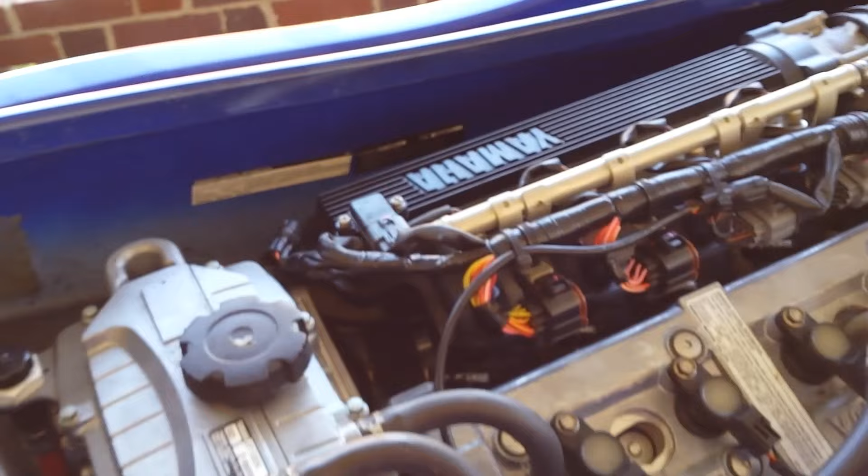Well, Dad just said the oil is doggone $12 a quart for it. Alright, so we got the top of the engine here. Of course, this right here is where you're going to pull the oil out of it and put the oil in.

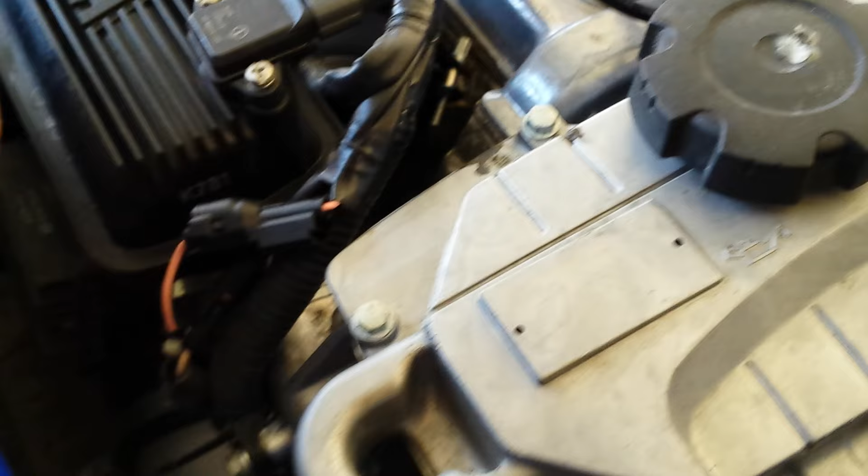But the trick we had to find was just to find the doggone oil filter alone. Looked around several places on the internet, and no one could really give a definite answer as to where the thing was. So we kept looking and looking, and we discovered it.

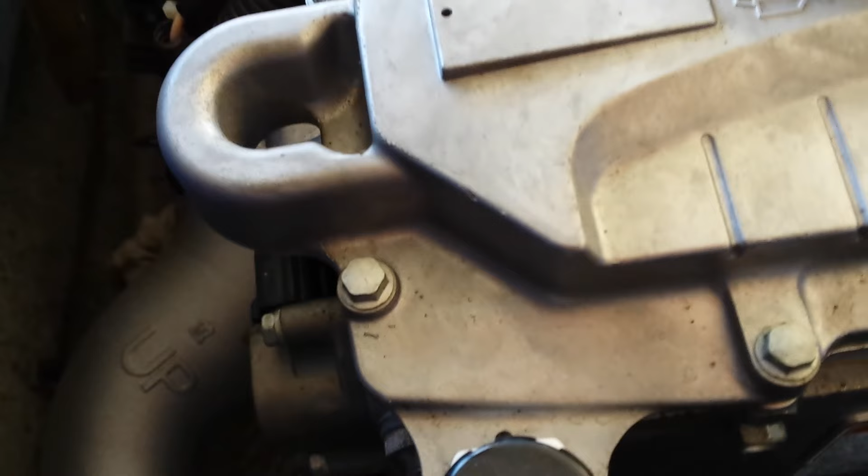Let me get this stick and point it out to you. Look where I'm at on the motor - this is where you're going to put the oil in, it goes down inside that reservoir. Here's your valve cover, watch where the stick goes. Right there at the end of my stick is the filter.

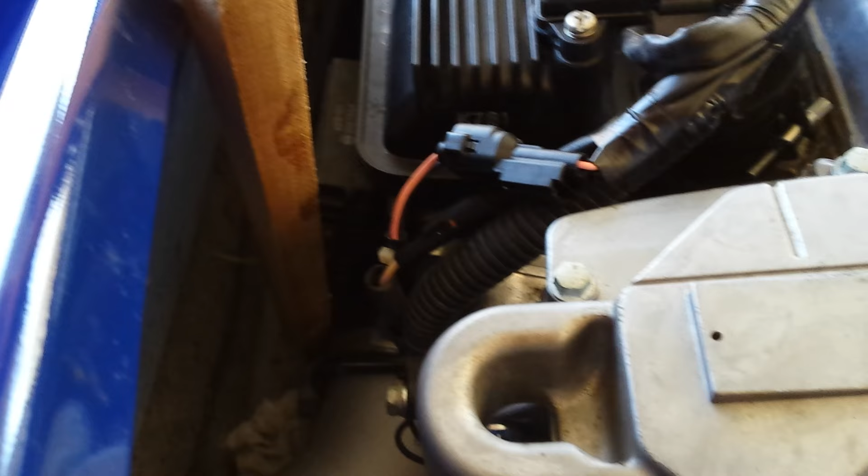See where the exhaust here is coming back? Right in front of that is where the filter's at. It is shoved down in a hole, so Yamaha's not going to make it easy on you.

Alright, let me get the tools ready. We're going to start changing this filter out and get the oil out.

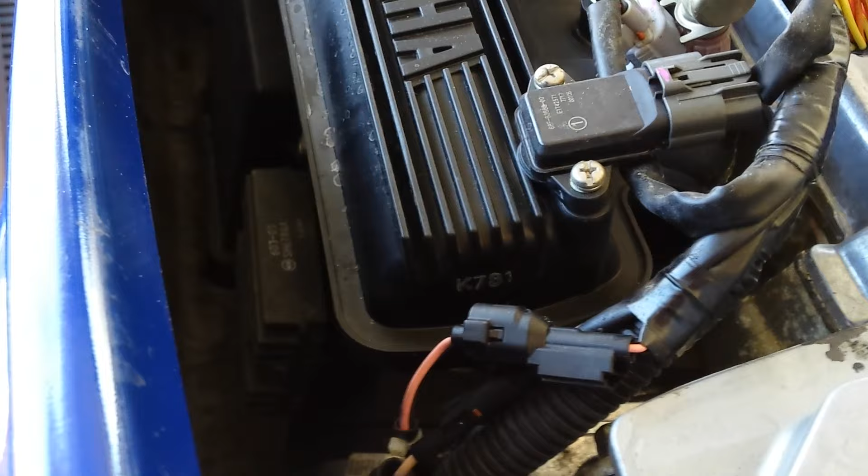Alright, we've already pulled some of the oil out of it, but just so I give you guys a demo of the nifty little pump. You guys can either use that one YouTube video I have about using the suction pump, the airline, or I'll put a link down below where you guys can get a pump to pull this stuff out of here.

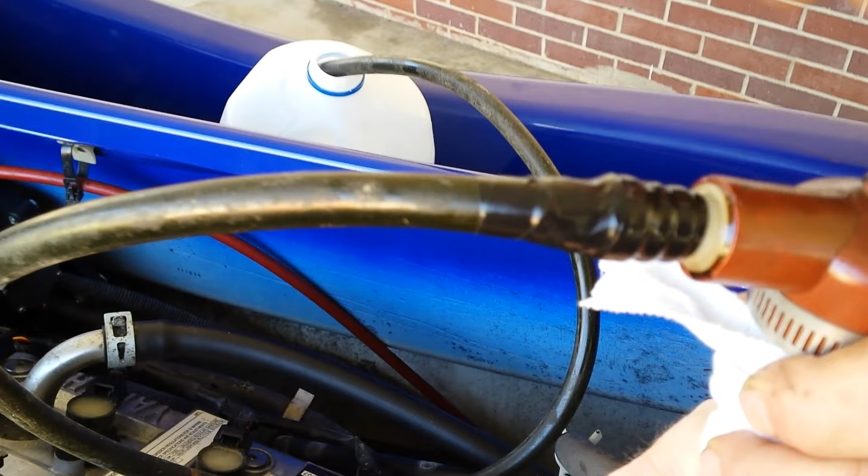But basically, just drop it down inside there, and got a jug right there, pumps it right out. The rag is because the pump's leaking - got a brand new one and it don't even work. So this is an old pump right here that's leaking, so wrapping a rag around it to keep from making a mess. Yeah, you do that redneck engineering, do what you can to make it work.

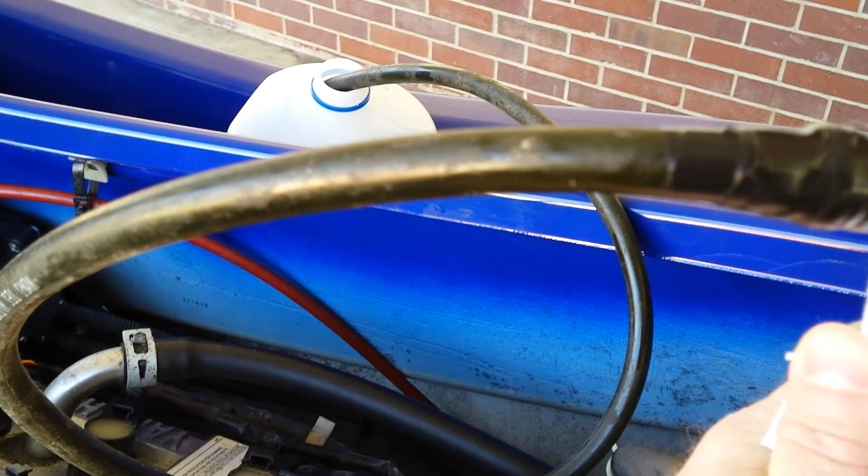So you can get them pumps a lot slower at Walmart, that's for a lower unit on a boat. It's a good idea, go to Walmart, get the lower unit pumps - that'll work great on these. It's slower.

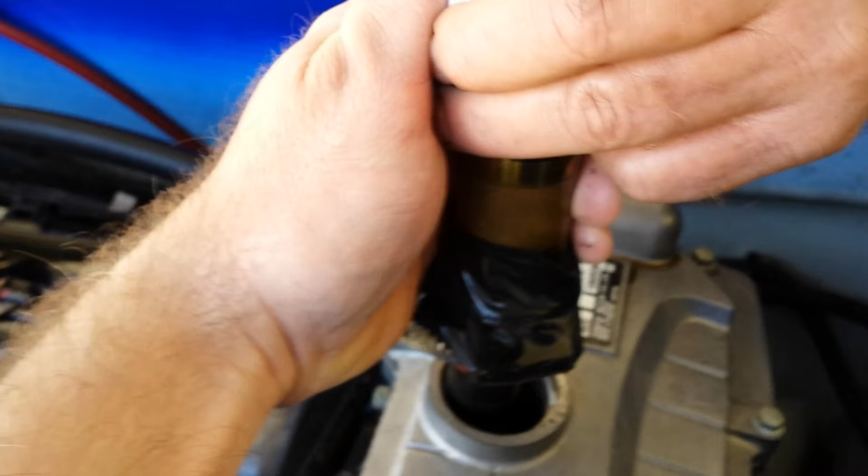Lucky, it's puking oil.

Over there's that pump that's talking about.

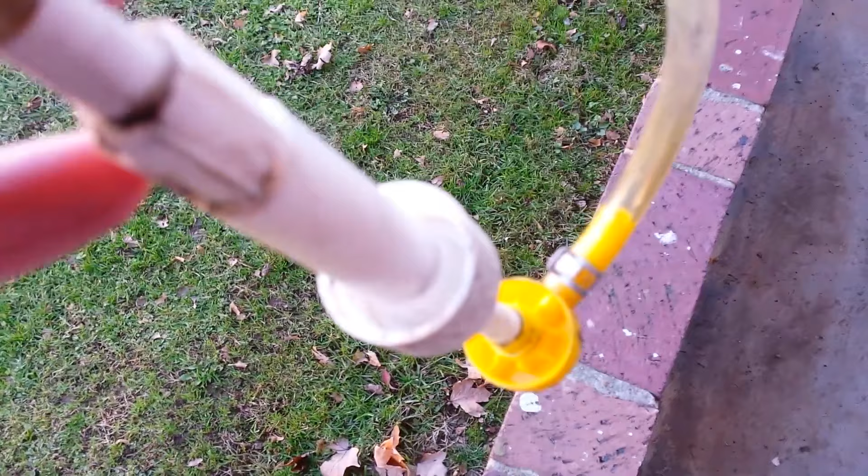And here's another little nifty pump here that you can pick up at your local department stores. It's for lower units on the boats, but what you can do is pump the oil back into it. Or if you want to pump the fluid out, stick this inside the reservoir here where that's at, stick that down inside there and just pump it. It's slower than the pump we're using currently, but hey, it still works - it gets the job done.

See down yonder? That's where it's at now. I just dropped it, but you got the point.

Now, after you get all the oil pumped out, you can see it's having to come in from the side where the exhaust is, arm going up the side there and getting to the filter. There's a rag under the filter because there's really not much way, whenever you pull that filter off the block, you're going to lose some fluid, some oil. So having something underneath to try to minimize your mess.

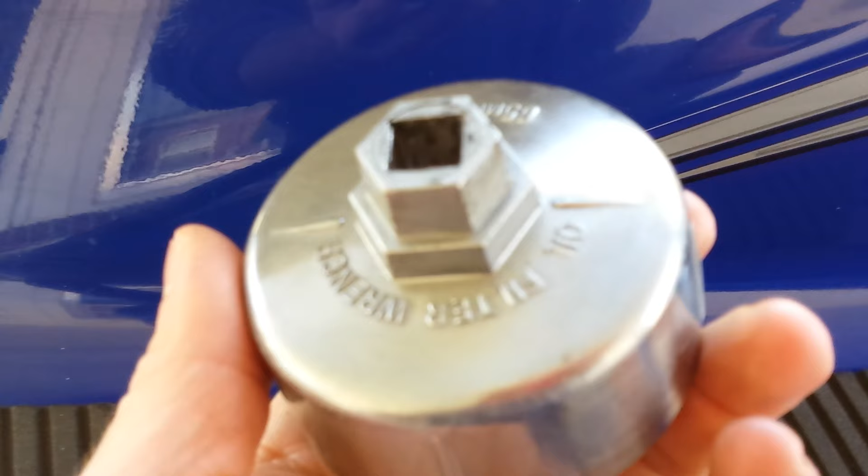Okay, you look at the new filter here, this little socket set right here. What'd you say you got these? Harbor Freight? Yeah, my dad picked these up at Harbor Freight. Handy little things, they come in a multi-pack, you can grab different filters. This little bitty one worked really good on this.

And if you've got one, just be sure I'm telling you guys the right number - it's the Yamaha VX1100B-G.

And here is your filter part number, if I can focus on this. Just in case, here's the Yamaha number and the Denso number: 5GH-13440-50.

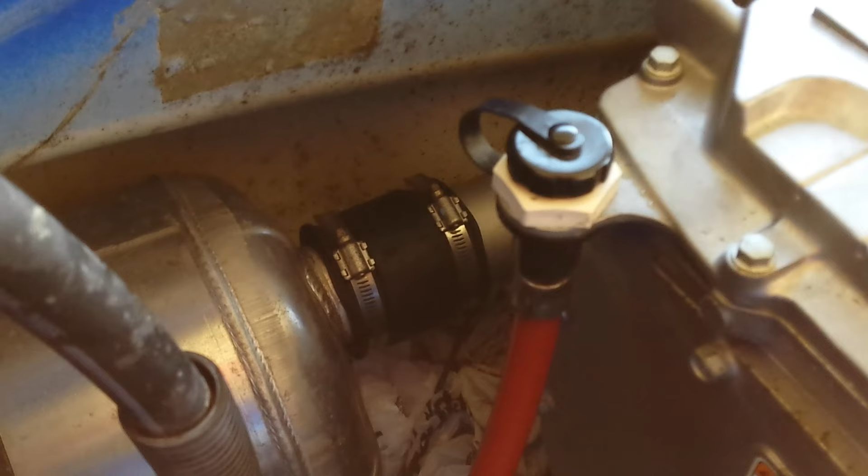So we're going to cram my arm back down inside there again and put the filter on. It's kind of a bear to get down inside there, people. It really is.

One thing I wanted to point out before you put the filter on, see the ring is nice and shiny. Make sure you put a little oil on it, because you don't want that ring sticking to the block. If it does, next time you go to change the oil, you take off the filter and if you're not paying attention, that O-ring sticks to the block and doesn't come out with the filter. You're going to double stack your O-rings, which will cause one serious leak the first time it fires up. Oil leaks equal blown motors. Pay attention. Put a little oil on it so it doesn't stick to the block.

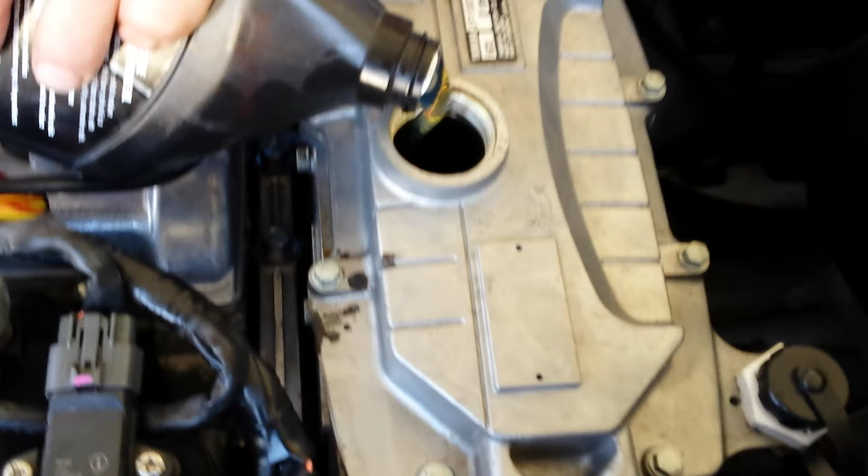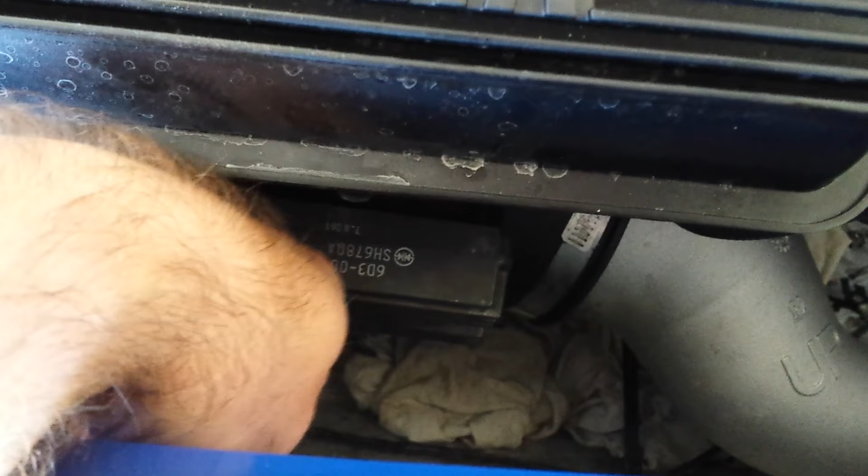Let's top off the oil. Now, what I discovered getting the filter on - like I said, if you see this control box, whatever, there's the exhaust here, and the filter's way down inside there. You can see we got the rags to catch the oil. The filter is way down - I can't even get the camera angle right to show you where it's at.

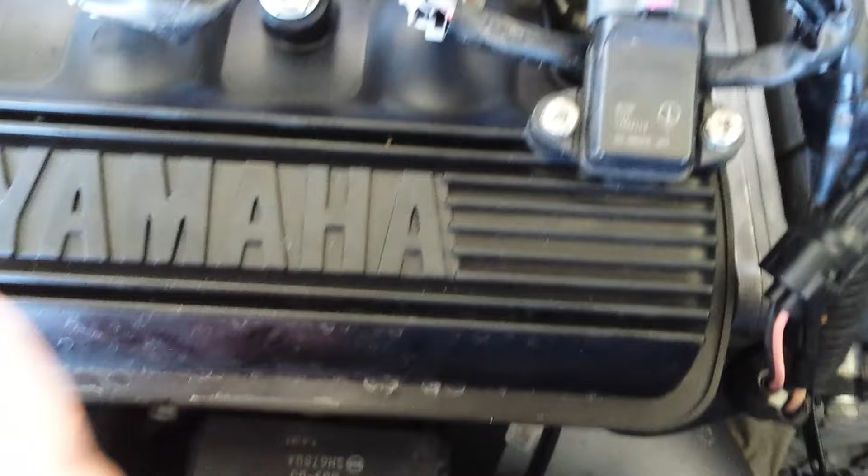But I ended up taking my left arm down through here, turning around this way because I'm laying on top of the motor just about. My right arm's coming in from behind the exhaust here, coming in this way, underneath the exhaust. You see where my thumb is - go under the exhaust, come back this way with my right arm, turn the filter here, support it with my left hand. It was a trick, but I got it in there.

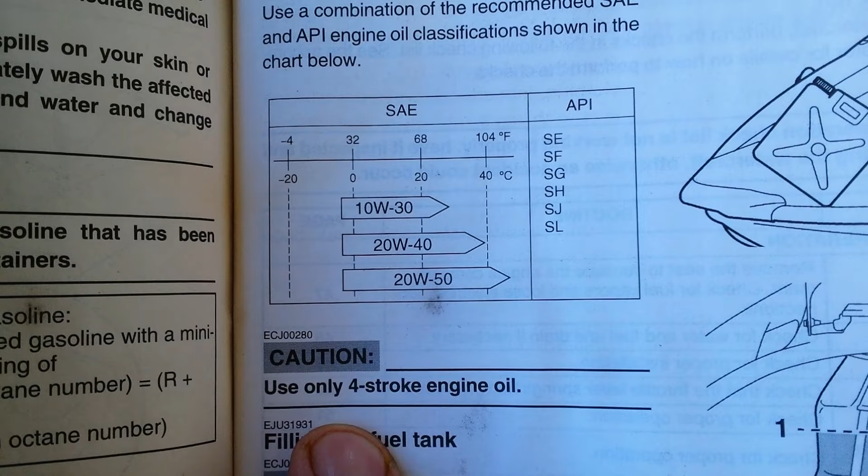Alright, what you're looking at here is the oil section - this is out of the manual for the Yamaha VX1100 itself. Well, you can see it's had better days. So anyway, there's your weight of oils recommended for certain temperatures.

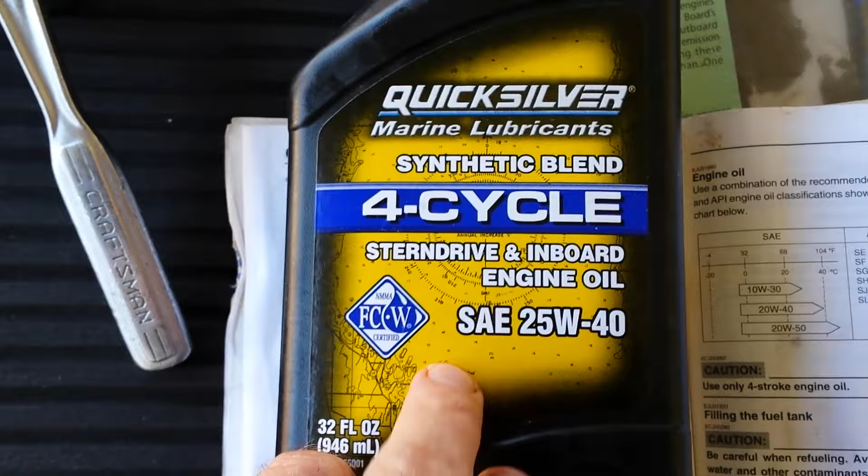In this area here, our Yamaha shop is pretty close, where we get a lot of our stuff for our motorcycles. This right here is recommended. So that's what we're dumping in it.

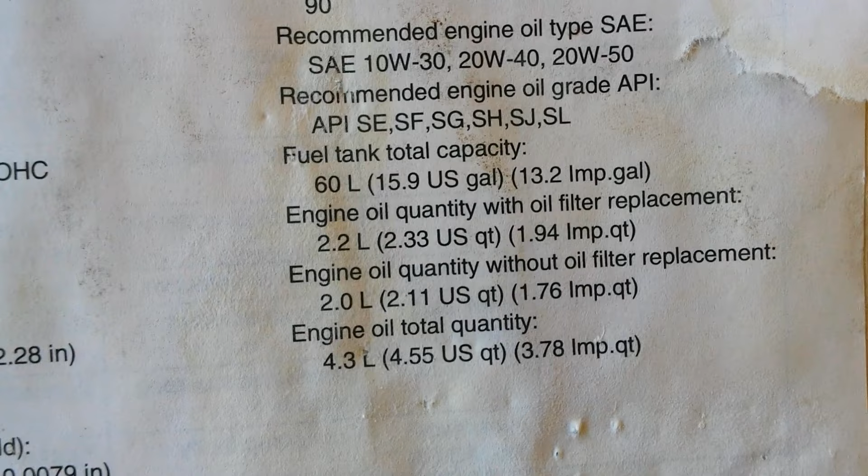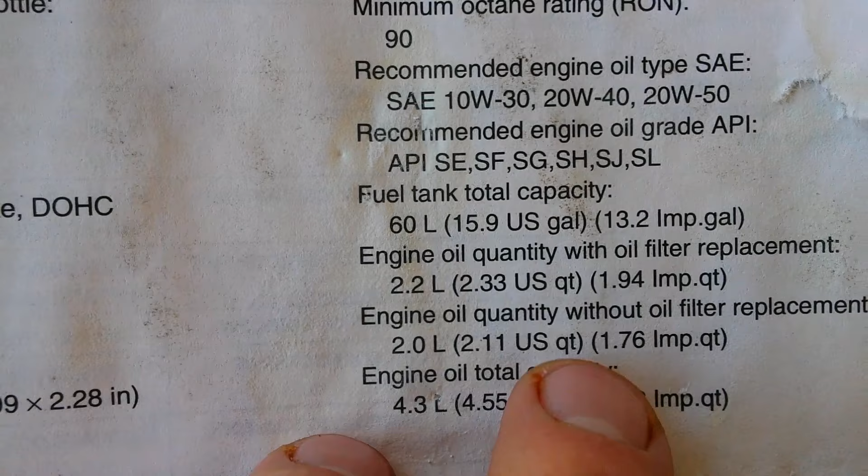Okay, what you're looking at here, again, is the specifications from the service manual. Total engine quantity capacity of the block is going to be 4.5 quarts, but that's not whenever you change oil in the motor. Here is what you want: when you do a filter, a little over 2.3 quarts is all you need. It is a bit deceiving when you look down here and see total oil quantity at 4.5.

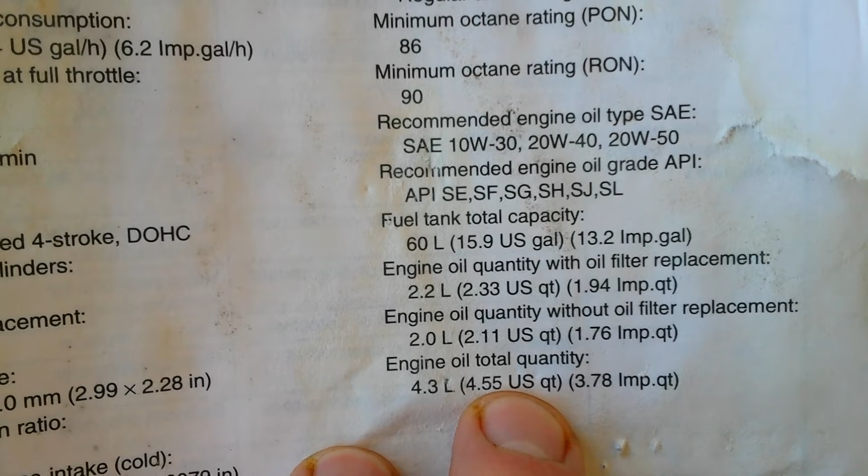Because being a dry sump motor, some of the oil is still left circulating through the system. So you still have some oil in the engine whenever you change oil. So if you change it with the filter, that's how much you need - the 2.3 quarts. And at $12 a quart, you don't want to buy any more than you have to.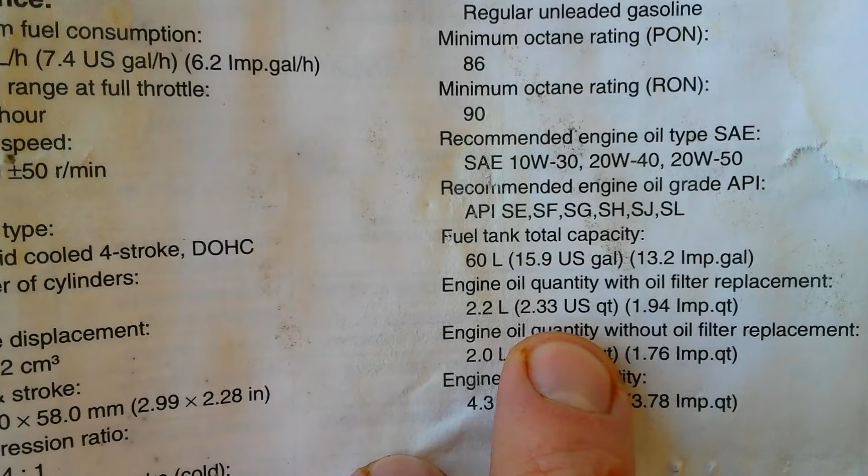Now, the oil and everything in it - we're going to check it real quick. Pretty much the procedure checking the oil in this thing, and I called the Yamaha shop to confirm my suspicion, is the fact that you put the 2.3 quarts in it. It does get its cooling from the lake, ocean, wherever you happen to be running. So if you fire it up just enough to let it circulate, but do not let it run long enough for the engine to get warm.

There are other procedures if you're going to let it run for a long time - you have to run cooling through the system that you must follow. Call your local dealership, if you're running a Yamaha or whatever kind of jet ski you have, get the proper procedures, because you can mess up a motor quick if you don't do it right.

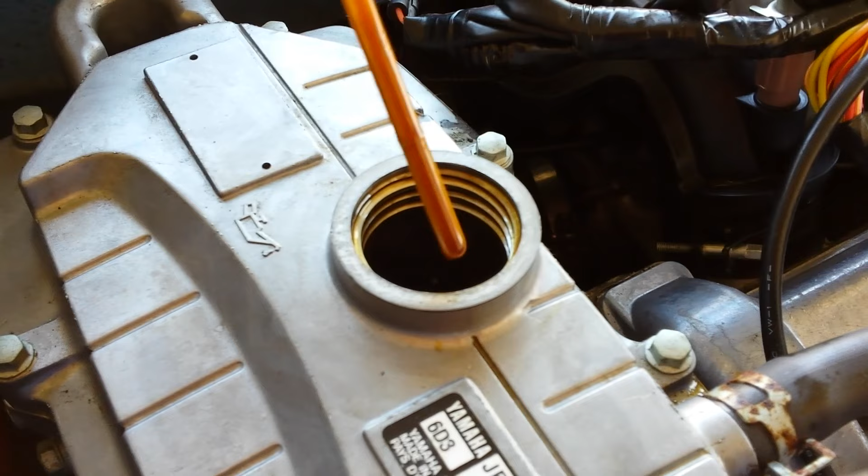You got to start the motor before you turn the water on. Right, you got to make sure the engine's running before you turn the water on. Otherwise, you'll get water going inside the valves.

Now, you can see at the top mark, so I can hang this dipstick here. Here's your full mark, and the oil is good. So that's how you change oil in a VX1100 Yamaha Jet Ski.